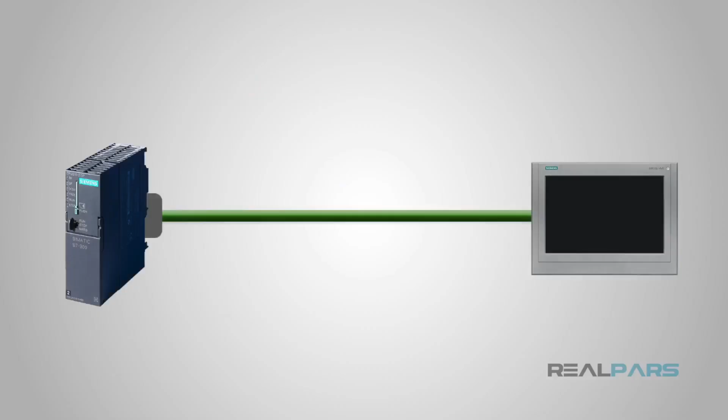One benefit of Profinet networks is that it can produce very fast response times. Response time is a measurement of the time it takes for a piece of data to travel across the network from one device to another. Faster response time means more up-to-date feedback can be gathered from devices, and more precise command signals can be given. Profinet response times vary from a few milliseconds down to only a few hundred microseconds, making it ideal for real-time motion control.

With Profinet communication, real-time data is given priority over other network traffic, ensuring reliable communication between high-speed devices. Other forms of network traffic could include live video streams from cameras or other imaging devices, data transfer between the PLC and an operator control station, or communication between other networked components. Real-time data, such as that used to control servos and other motion-related devices, should always have priority over these other forms of network traffic in order to ensure safe and reliable operation.

While a standard Ethernet cable may be used to connect Profinet devices, industrial-grade Profinet cables have better shielding and will provide better performance in an electrically noisy environment.

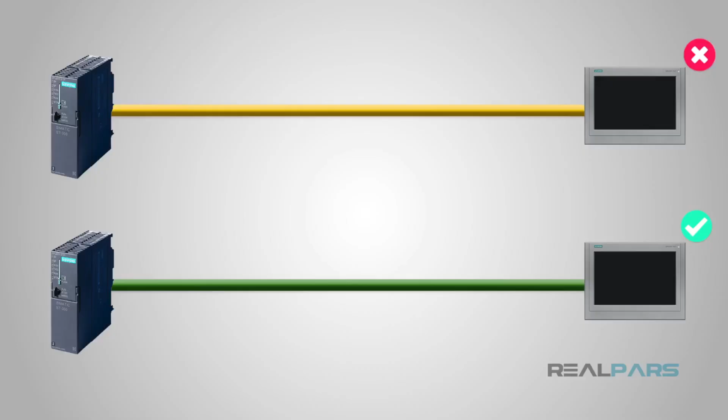Profinet devices must be assigned both a device name and a standard IP address. An IP address is an address that identifies each unique device on nearly all Ethernet-based networks. Each device on a network must be assigned an IP address in order to communicate properly. A device name, on the other hand, is used exclusively by Profinet devices to identify each other on the network. Without a device name, a device will not be recognized on the network, even if it has been assigned a valid IP address. Therefore, both a device name and IP address should be used.

The most common way to assign a device name to a network device is by using PLC programming software, such as TIA Portal for Siemens devices, or a standalone utility such as Primary Setup Tool. This can be done by searching for the device on the network, connecting to or going online with the device, and then setting the desired name. Device manufacturers may also provide their own software utilities for managing Profinet devices. Be sure to consult the manual if you're unsure how to assign a device name to a Profinet device.

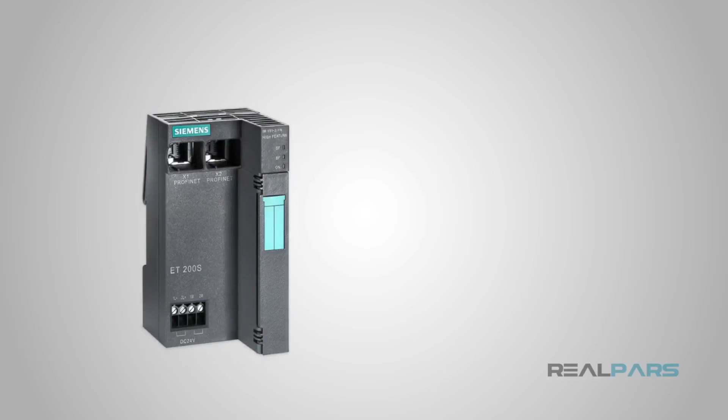When selecting components for your project, be sure that all devices are Profinet compatible, that they're capable of being used on a Profinet network. Other industrial Ethernet communications protocols, such as EtherNet/IP, are not compatible. If you are required to use a non-Profinet device for your project, you'll need to use a special gateway to connect the device to your network. These are available from a variety of vendors and are a cost-effective solution for adding non-Profinet devices to your network.

Profinet is a powerful tool. Learn the basics, and you'll be on your way to becoming an expert in no time.

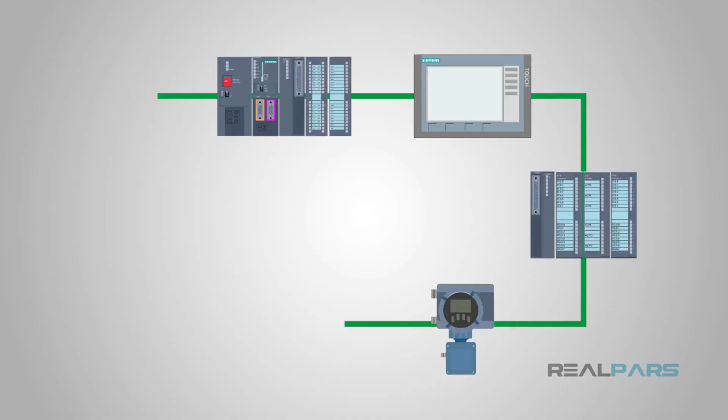A Profinet device is a device that uses the Profinet communication protocol to communicate with other network components. Examples of Profinet devices may include PLCs, HMIs, remote I/O racks, sensors, actuators, VFDs, and more. In this lesson, we'll go over these basic Profinet devices and learn what they're used for.

First, let's talk about PLCs. A PLC is a programmable logic controller. It is a small, yet often very powerful computer used to control and monitor automated processes. A PLC will often be networked to other devices that it uses to collect data and perform necessary functions, such as running a conveyor or locking a guard door. Profinet is the network of choice for Siemens PLCs.

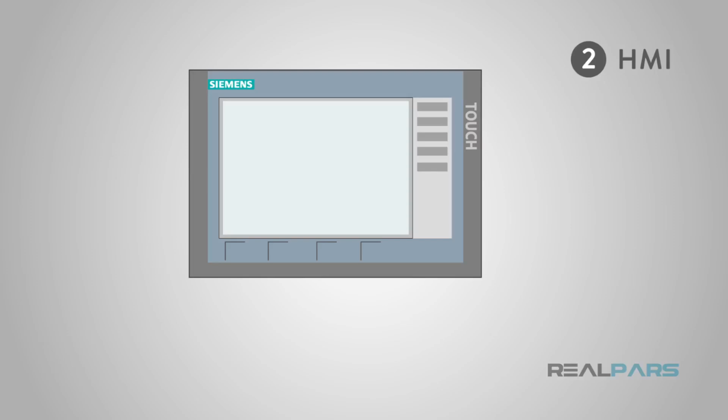HMIs are another common type of Profinet device. An HMI, or human-machine interface, may often be found in the form of a touchscreen-enabled operator panel, from which an operator can access a machine or system. An HMI may allow for both the control and monitoring of a process, as well as providing the operator with important information about the machine, such as if maintenance will be needed soon, or if an error has been detected.

HMIs can be very powerful, conveying hundreds or thousands of pieces of information between the user and the PLC every second. A high-speed network like Profinet ensures reliable data transfer between the HMI and the PLC.

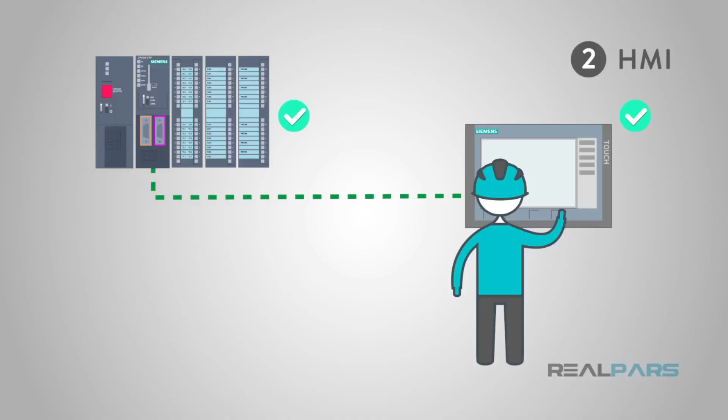Remote I/O is sure to be found on any large automation system. I/O stands for input-output.

In order for a PLC to do its job, it must be able to collect data via inputs and send control signals via outputs. Each input or output usually requires one or more wires to be run from a component, such as a sensor or an actuator, to the PLC. In small systems, this is not usually a problem. In larger systems, however, this can result in hundreds or thousands of wires being run from the PLC out to each of the connected components. This can result in a costly and time-consuming setup process, and can complicate troubleshooting later on.

In order to eliminate large and costly wire runs, a remote I/O station may be implemented at one or more locations in a system. Tens or hundreds of sensors and/or actuators may be connected to a single remote I/O station. The remote I/O station then transfers data to and from all of the connected components back to the PLC over a single network cable. This prevents unnecessarily large amounts of wire being run back to the PLC and can save hours or days of time spent building a machine.

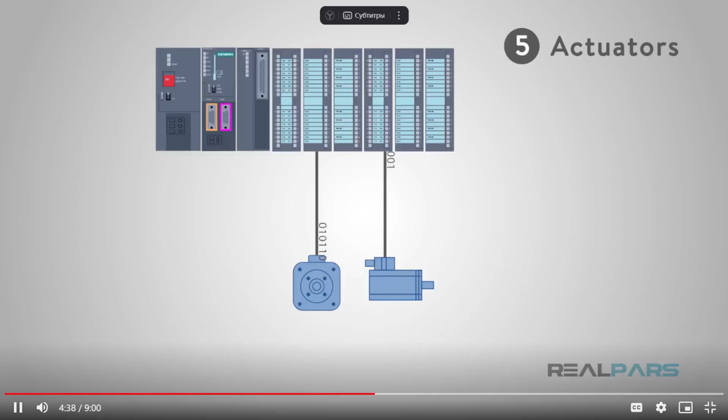Actuators are another class of process control components that may communicate over Profinet. In order to do its job, a machine must perform certain functions. An actuator is a device that performs a certain movement when given a command signal. These actuators may perform tasks such as closing or opening a door or valve, pushing an object from one conveyor to another, applying a label to a product, or positioning an object. As with sensors, actuators may operate as network devices or using standard I/O, but Profinet may provide more valuable feedback and greater control than you would otherwise have.

Lastly, a VFD is another device commonly found on Profinet networks. A VFD, or variable frequency drive, is used to control the speed and direction of an electric motor. These motors may be used to control the speed of a conveyor belt, the speed of a fan, or other motion-related actions.

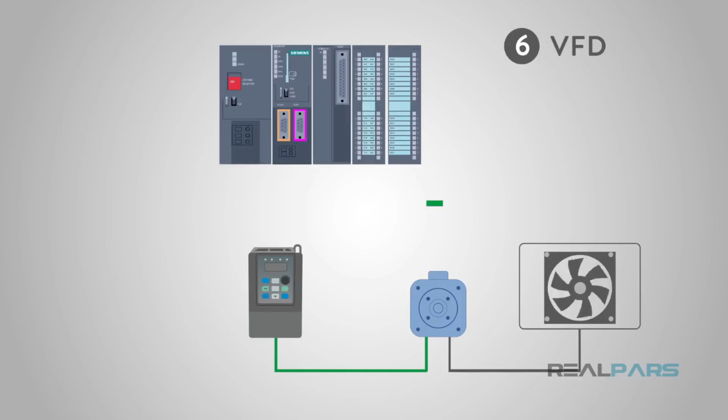Using Profinet over standard I/O to communicate with a VFD gives you access to hundreds or thousands of feedback and control parameters. This enables very precise control of a motor and allows you to gather data about factors such as speed, torque, and other things that may provide valuable information about the condition of your motor. Diagnostic information may also be communicated to the PLC over Profinet, thus speeding the troubleshooting process if something goes wrong with the motor.

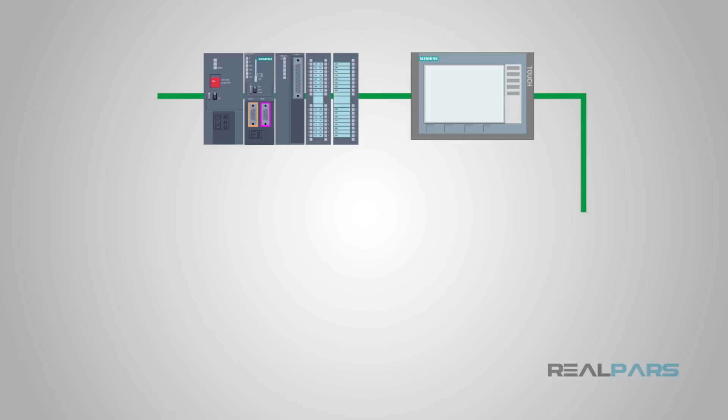Profinet devices are found in many factory and industrial environments where automation is used. These devices are used to control and monitor automation processes to ensure that personnel and equipment are protected from potential hazards, to ensure that quality standards are being met, and to ensure that machines are operating at peak performance.

You might notice that the Profinet port on a device looks very familiar. Profinet networks use much of the same physical hardware that you would find on a standard home or industrial Ethernet network. A standard Category 5 or Category 6 Ethernet cable may be used to connect devices in an environment with little electrical interference, such as at your desk. In a high-noise environment, however, official Profinet cables should be used as they implement robust shielding to protect the network from unwanted electromagnetic interference.

Profinet devices may be connected directly to each other, or by use of a Profinet or Ethernet switch. If you'll have more than 2 or 3 devices on your network, chances are that you'll want to use a network switch to better organize your network. If a Profinet device becomes damaged or is otherwise disconnected from the network during operation, an error LED on the PLC will usually notify the operator that a device has been lost from the network.

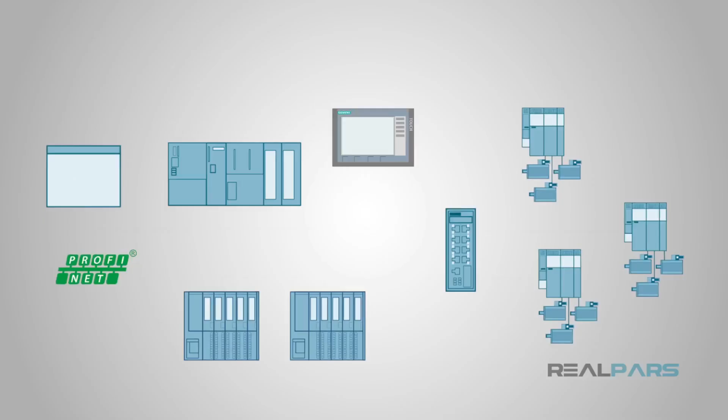A PLC acts as a sort of digital brain, and in addition to running the program that controls the process, it will also monitor the Profinet network and attempt to notify plant personnel that a device has been lost from the network. The PLC knows what devices should exist and will generate an error if something is missing. When a program is downloaded to a PLC, information about all network devices is also transferred. If the actual network configuration does not match the configuration downloaded, the PLC will know that something is wrong.

In conclusion, Profinet devices are powerful components designed to make your life as an automation engineer a little easier. No matter the size of your project, Profinet can provide a cost-effective, convenient solution.

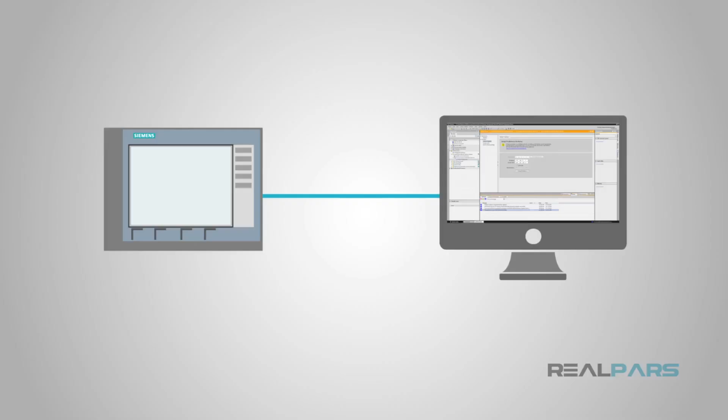In our last video, we learned about IP addresses, what they are, and why they're important. In this video, we'll learn more about IP addresses, how they're assigned, static or dynamic, how they're used in the world of industrial controls, and how keeping a record of your IP addresses can be helpful when troubleshooting problems. First, let's discuss how addresses are assigned. IP addresses may be static, assigned manually, or dynamic, assigned by a computer.

A static IP address is set by the user and will never change until changed again by the user. A dynamic IP address, on the other hand, is an address assigned to a device automatically by a router using DHCP. DHCP stands for Dynamic Host Configuration Protocol. Using DHCP, a router will automatically assign addresses to new devices as they're connected to the network. This is most likely how your home network is configured.

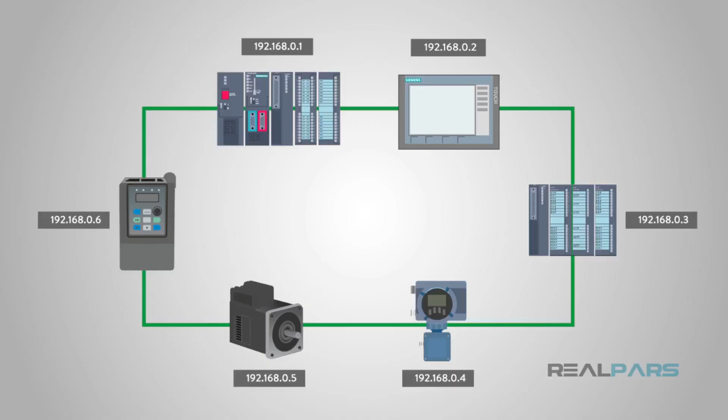Most industrial control systems use static IP addresses. One reason for this is because it is desirable to have a high level of control over your network, and troubleshooting is easier if you know which device a specific address is assigned to. For example, if your HMI is not behaving correctly and you know that your HMI has an address of 192.168.0.2, you can attempt to communicate with that IP address using your computer. If you're unable to communicate with that address, even though you're connected to the same network, a network communications error is likely the cause of the undesired behavior. If you are able to reach that IP address, however, this would indicate that another issue may be present.

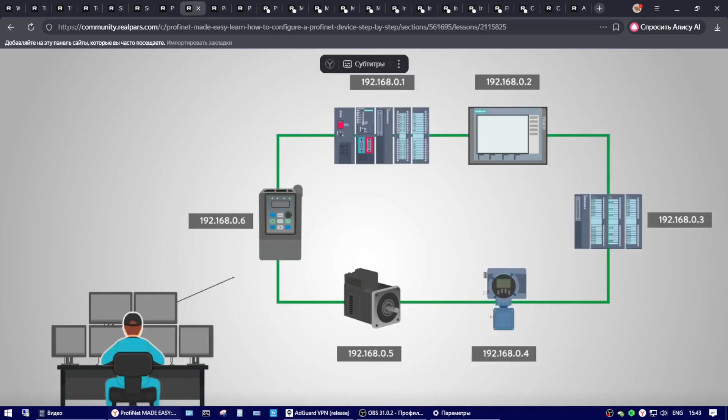IP addressing is a major aspect of most industrial control systems, and learning to assign and manipulate IP addresses is a must-have skill to have in your toolbox. Take the time to learn the basics of networking. The more you know and understand the basics, the better prepared you'll be to solve problems and provide effective, quality solutions for your client.

Today, we are going to learn how to assign an IP address and a device name to a Profinet device using TIA Portal. To begin, you'll need to have TIA Portal opened to the project view, which looks like this.

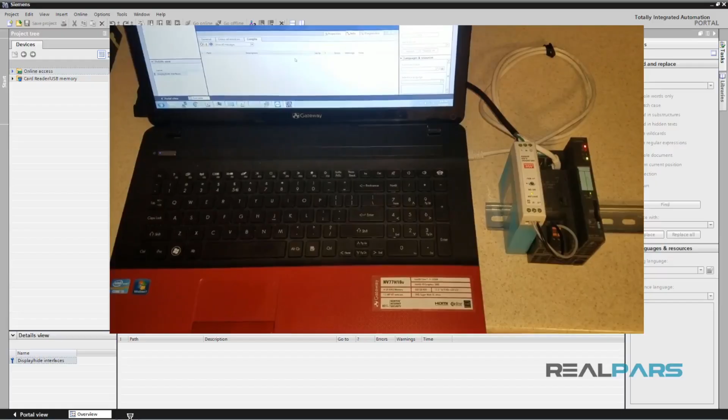Then, you'll need to make sure that your Profinet device is powered on. Here, I have a Siemens IM151 module connected to a 24-volt power supply. I will be using this device for this demonstration, but the procedure I am about to show you will work with most Profinet devices.

Next, connect your Profinet device to your computer with an Ethernet cable, as you can see here. This procedure may work with or without the use of an Ethernet switch. Now, we are ready to begin.

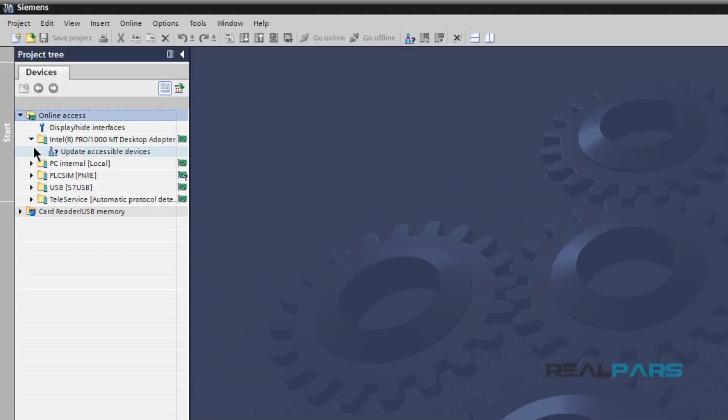To start, navigate to the Online Access entry in the left task card. Click the drop-down arrow to view a list of all network adapters on your computer. Find the Ethernet adapter that your device is connected to and click the drop-down arrow next to it. Now, double-click the option that says Update Accessible Devices. This process may take 10 to 15 seconds.

After TIA Portal has finished scanning for devices, your device should appear in the Online Access submenu. If you experience difficulties finding the connected device, you may need to use a different network adapter or a different Ethernet port on your computer.

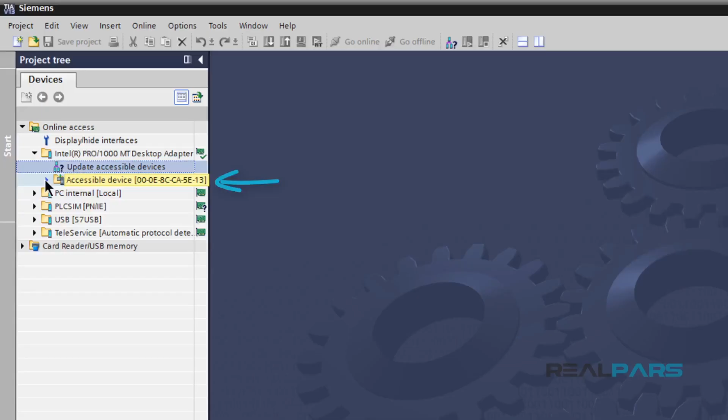If your device has been factory reset or is in its original out-of-the-box factory state, it will appear with the name Accessible Device, followed by the MAC address in square brackets. If the device had already been assigned an IP address, the IP address would appear here instead of the MAC address. This is how we know that this device has not yet been assigned an IP address.

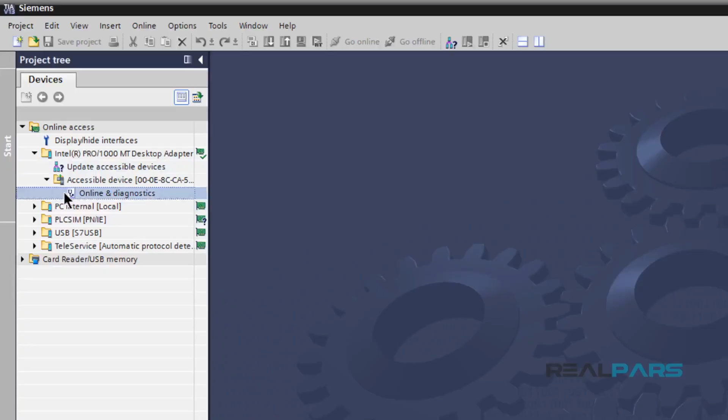Click the drop-down arrow next to Accessible Device, and then double-click Online and Diagnostics. From here, we are able to directly manipulate the connected device. To set the IP address, click the drop-down arrow next to Functions, and then click on Assign IP Address.

Now, you may enter the desired IP address for this device. For this example, we will use the address 192.168.0.1 with a subnet mask of 255.255.255.0. Click on Assign IP Address. After about 5 seconds, you should see a message in the bottom task card saying that the parameters were transferred successfully.

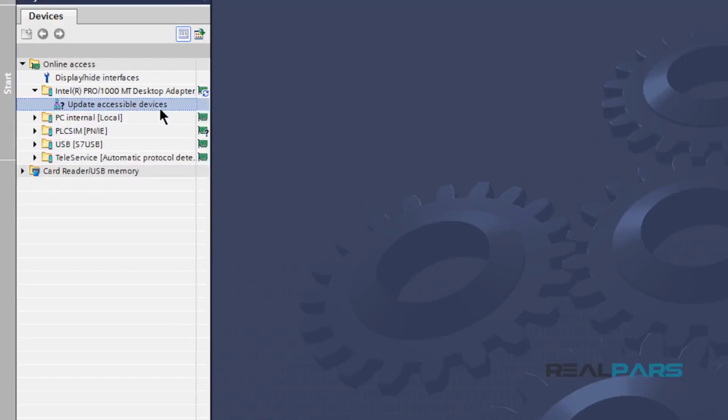You will notice that if you double-click on Update Accessible Devices again, or just wait a few moments, the list will refresh and your device will appear with its new IP address. This is one way to verify that the IP address assignment has been successful.

Next, we will set the device name. To do this, go back into the Online and Diagnostics menu, and then go to Functions and Assign Name. Here, we can specify a name for our device. In this example, I am using an IM151 Profinet Remote I/O module. So, I will give this a device name of IM151. Click on Assign Name. You should see a message in the bottom task card stating that the device name was successfully assigned to the device.

Congratulations! You've just configured your first Profinet device, and it's now capable of communicating with other devices over a Profinet network. Check out the other videos in this course to learn how to make this process even easier by copying these settings from device to device using a Simatic micro memory card.

Today, we are going to learn about Simatic micro memory cards. Simatic, or Siemens Automatic, is the name of Siemens' line of automation products. The Simatic product line includes PLCs, HMIs, programming software, distributed I/O, networking hardware, and more. Many products within the Simatic family utilize a micro memory card, also known as an MMC card, to perform their function.

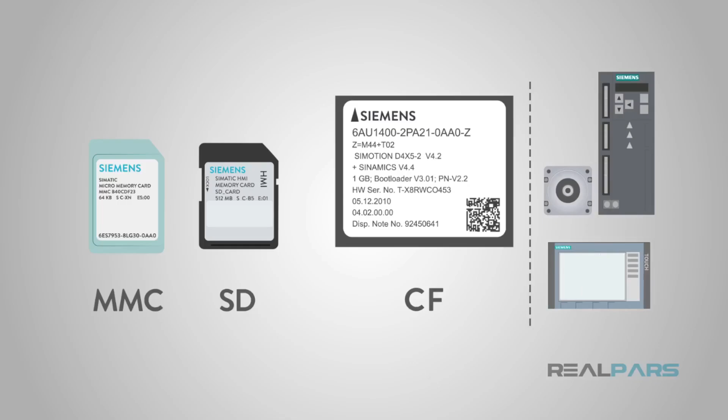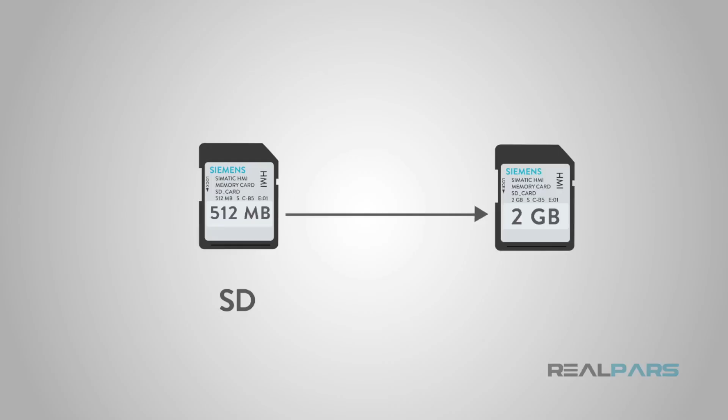Siemens SD cards have a significantly greater capacity than Siemens MMC cards, ranging from 512 megabytes to 2 gigabytes in size. The use of an SD card may be optional, depending on the application. S7-1200 and S7-1500 PLCs have built-in memory for program storage, so an SD card is not required to store the program.

HMIs do not require external memory to operate. However, it is very common for an HMI to utilize an SD card to store special pieces of data, called recipes, as well as backup data. We will discuss HMI backups and recipes in another video.

Let's talk about some real-world scenarios in which an MMC or SD card may be used to save time and money for you and your customers. Let's say, for example, that a customer of a machine builder requests a new feature to be added to their machine. If this feature requires a change to the PLC program, a programmer may be required to fly to the customer site to modify the program, resulting in a costly service trip. A simple 2-day trip can cost thousands of dollars in airline tickets, lodging, car rentals, etc.

Rather than spending a lot of time and money to travel to the customer's location, an SD or MMC card can be prepared with the appropriate changes, and then the card can be shipped to the customer. The customer then simply replaces the original card, and voila, the update has been applied.

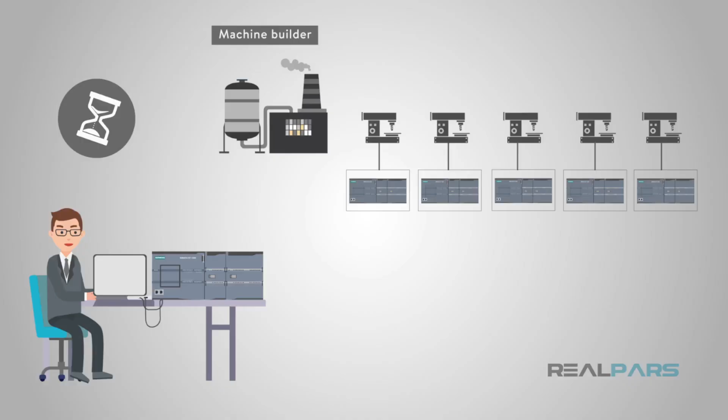To reduce the amount of time spent starting up a machine, you decide to save the program to some memory cards at your desk before heading to the shop floor. More on this topic in following videos. Now, all you need to do is insert the memory cards into their components. Press a few buttons, and the machine is now programmed and ready to go, leaving you with more time to work on other tasks.

Understanding how memory cards are used in industrial control systems is a valuable tool to have in your toolbox. Take the time now to learn how to use them so that you can save yourself time and money in the future.

Welcome back. Today, I'm going to show you how to save the device name of an IM151 interface module to an MMC card. Knowing how to back up and restore the device name can save you valuable time in the field. If a device must be replaced, restoring settings from a previously created backup will be much faster than using your computer to configure the new device.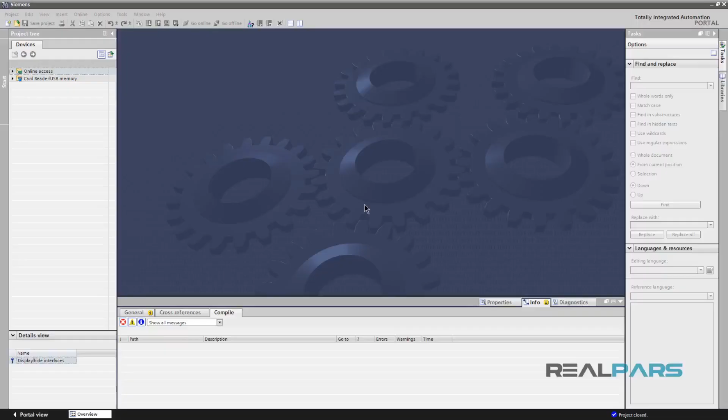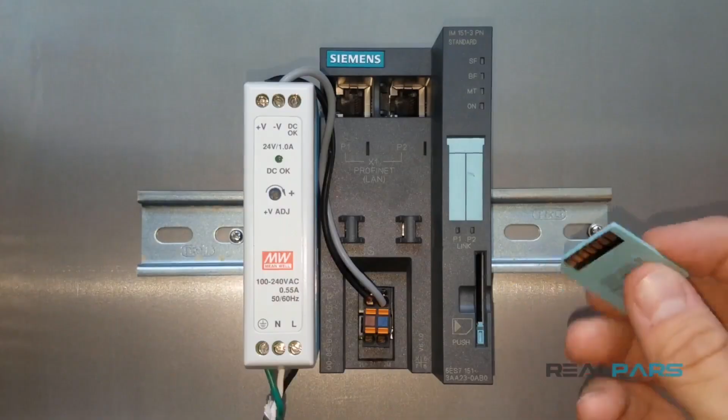To begin, you'll need to have TIA Portal open to the project view, and you'll need to open the TIA project containing your IM151 module. You'll also need to ensure that a SIMATIC micro memory card is inserted into your device. If no memory card is present, be sure to power down the device before inserting one into the device. Connect your computer to your IM151 module via an Ethernet cable and power on the device.

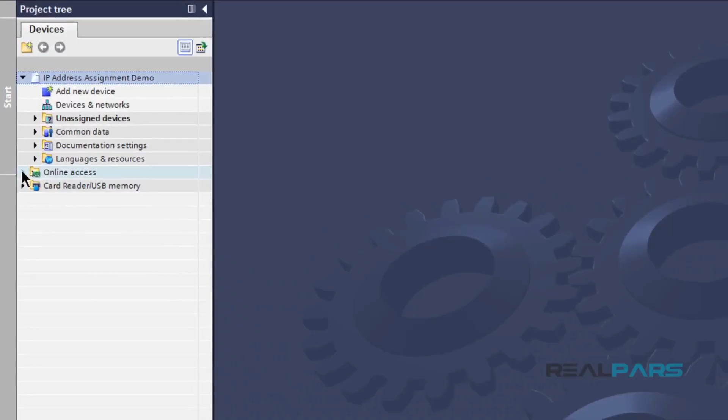First, let's verify that this device has already been assigned the desired name. To do this, navigate to the Online Access entry in the left task card. Click the drop-down arrow to view a list of all network adapters on your computer. Locate the Ethernet adapter that your device is connected to, and click the drop-down arrow next to it. Now, double-click the option that says Update Accessible Devices. This process may take 10 to 15 seconds.

After TIA Portal has finished scanning for devices, your device should appear just below Update Accessible Devices. If you experience difficulties finding the connected device, you may need to use a different network adapter, that is, a different Ethernet port on your computer.

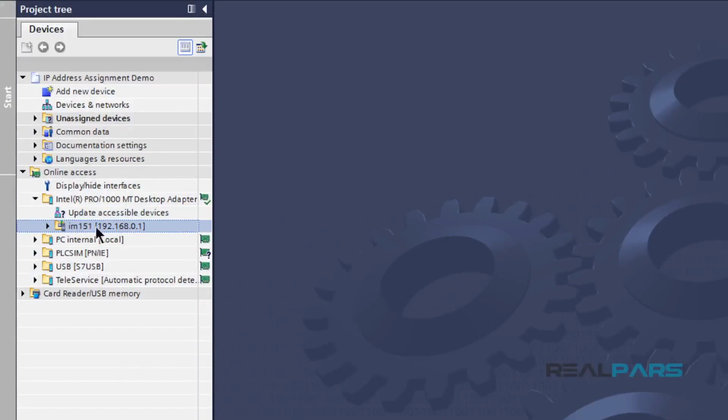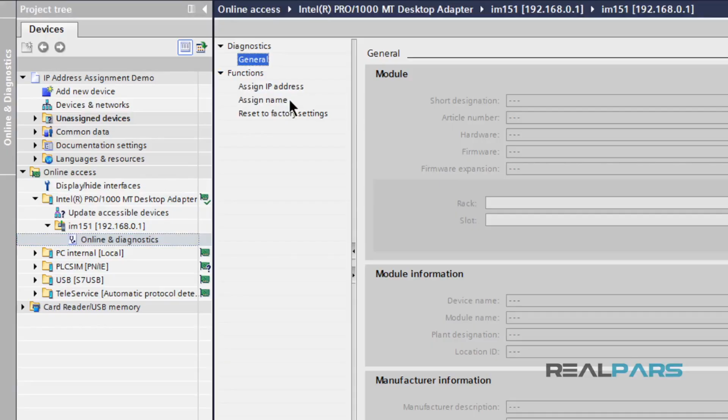The name of your IM151 will be displayed here, as well as the IP address. If you need to change the name, you can do so by clicking on the drop-down arrow next to your device, double-clicking on Online and Diagnostics, and navigating to the Functions drop-down menu, and then Assign Name. Enter the desired name, and then click on Assign Name.

After a few seconds, a message should appear in the information task card at the bottom of the screen, stating that the Profinet device name was successfully assigned. Once you've verified that the device name is correct, double-click on Devices and Networks near the top of the project tree task card. From here, you'll be able to view all of the devices in your project.

Locate your IM151 module, right-click on it, and then select Write I/O Device Name to Micro Memory Card. The procedure happens instantly, and the device name is now saved to the memory card. You may wish to verify that the procedure has been successful. It is important to note that this procedure only saves the device name to the memory card. The IP address will be lost.

Profinet communication only requires device names to be present. As such, you may want to make note of what the current IP address is before we continue, as the verification will involve erasing all settings from the module. To verify that the procedure has been successful, power down the IM151 module and remove the MMC card by pressing the eject button just below the card. A small flat blade screwdriver may be needed for this purpose.

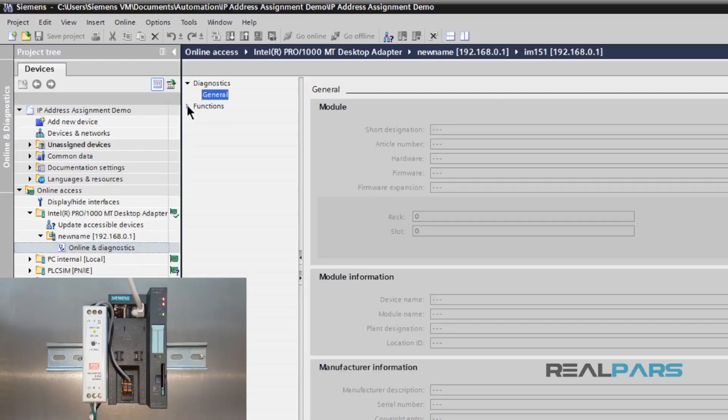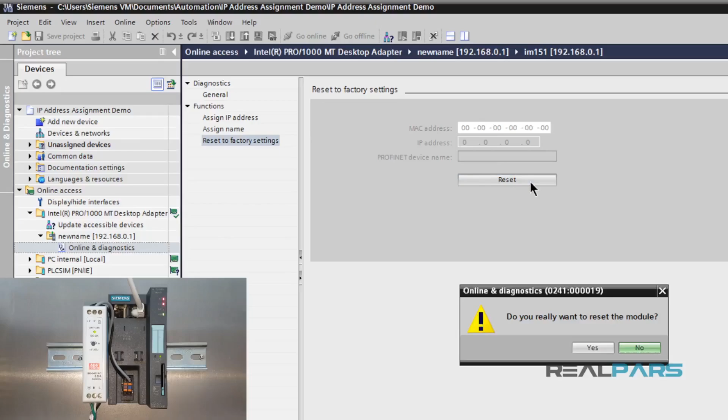It is important to remove the memory card before performing a factory reset. Otherwise, the card will be erased as well. Once you've removed the card, power on the device and return to the Online and Diagnostics menu for your device. Click on the drop-down arrow next to Functions and then select Reset to Factory Settings. Click on the Reset button and then click Yes when prompted for verification.

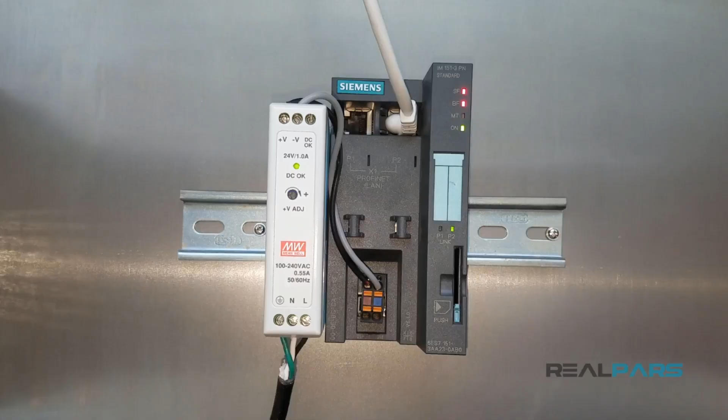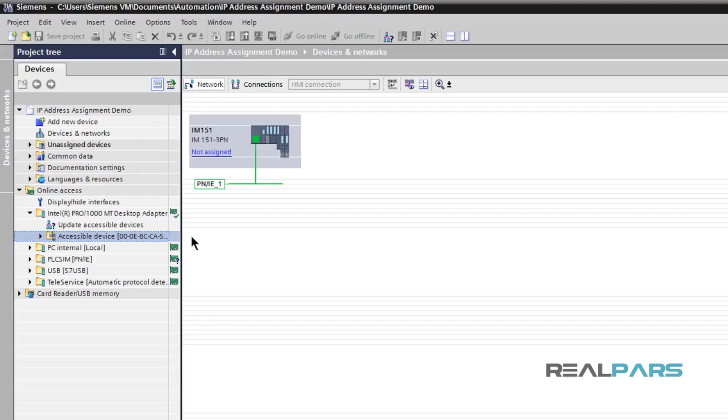The 4 lights at the top of your IM151 module, labeled SF, BF, MT, and ON, will all illuminate for about 2 seconds, and then return to their natural state. Double-click on Update Accessible Devices again. Your device should now appear as Accessible Device, indicating that the device does not currently have a name. By this, we know that the factory reset was successful.

Power down the device and reinsert the MMC card. Power on the device. During power-up, the module will check to see if a device name has been saved to the inserted MMC card. If so, it will be copied to the device. In TIA Portal, double-click on Update Accessible Devices. The device should now appear with the name it had before performing the factory reset. If so, congratulations! The procedure was successful.

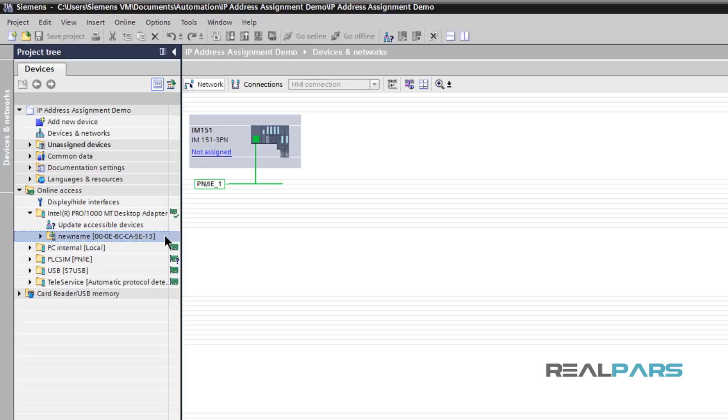You can now power down the device, remove the card, and use this card to assign this device name to other IM151 modules. To do this, all you need to do is insert the memory card into a new device, power it on, wait 5 seconds, power it off, and remove the card. As you can see, this can greatly speed up the process of assigning device names, and it eliminates the need of a computer for this purpose.

In this video, we learned, number 1, how to set a device name. Number 2, how to save.

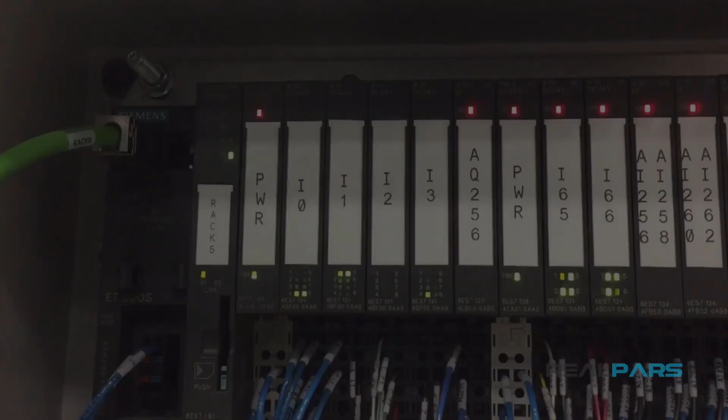The purpose of this video is to, 1, demonstrate the process of assigning a device name to a Profinet device using a micromemory card, and 2, demonstrate that a Profinet device can communicate with a PLC using only a device name.

Here, we see an IM151 head module connected to a bank of I/O cards to form a distributed I/O rack. This module has been factory reset and currently has no device name or IP address. Let's power up the IM151 module. You'll notice that the BF light on the IM151 module is blinking red, and that the SF lights on many of the other modules are solid red. This indicates that the rack is not communicating with the PLC.

Let's power down the module and insert a micromemory card that has a device name saved to it. Then restore power to the module. After a few seconds, the BF light stops blinking red and the other SF lights all turn off. This indicates that the rack is communicating with the PLC.

As we saw in the last video, only the device name is transferred from the memory card to the device during this procedure. The IP address is lost. As we can see, the device is still able to communicate with the PLC even without an IP address. Now, we can remove power to the rack and remove the MMC card. After restoring power again, we see that the rack is still communicating with the PLC, which indicates that the device name was successfully copied from the memory card to the device.